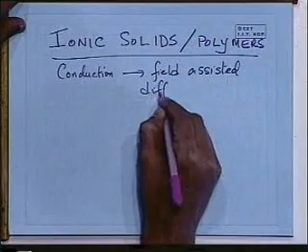In ionic solids, we saw the different kinds of defects that are possible. We've got vacancies, interstitials, Frenkel kinds of defects, Schottky kinds of defects, and remember we are talking of charge balances and so on. What we see here is the presence of these defects allows diffusion, so the atoms can move from one position to an empty space because of the presence of these defects.

And because these are not atoms anymore in ionic solids, they are charged species, so along with the diffusion of the species, we have charge transport too, which is essentially what we mean by conduction. In a normal case with no charge, covalently bonded solids or things like that, when the atom moves there is no charge transfer because they're neutral species. But in ionic solids, along with the diffusion of species, we have charge transport taking place.

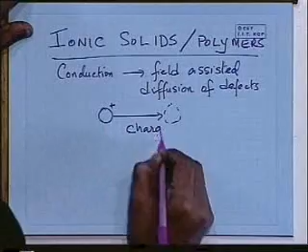So it then depends on the density or the concentration of defects that we have in such a material. And the species that could be responsible include vacancies, interstitials, non-stoichiometry, etc.

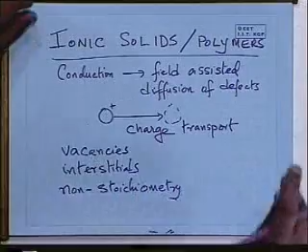So to take into account all these kinds of mechanisms, we will simply put that sigma is equal to the sum of the charge times concentration times mobility for each of the species. The same equation as before, except now we are summing it over each of the possible types of species.

And remember here, Q is not necessarily equal to E. It could be, but it's not necessarily equal to E. Why? Because the ions might be multiple. Very good, the charge is not just an electron transfer—there are charged species, ions that are moving, and they may be multiply charged. So whatever the charge of the particular ion, 2 plus, 3 plus, whatever it may be, or minus, accordingly will be the value that we have to use in Q.

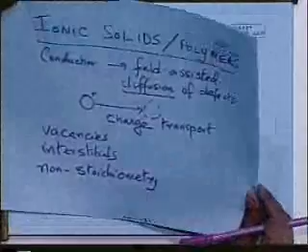Now in most of these cases, since it's diffusion, the key is diffusion, and diffusion is a thermally assisted process—higher the temperature, faster the diffusion. So we could, in most of these cases, model the behavior of conductivity versus temperature as sigma equals sigma naught exponential minus E sigma by kT. Again, a familiar equation, what we call the Arrhenius equation before, where we have put E sigma as the activation energy for conductivity.

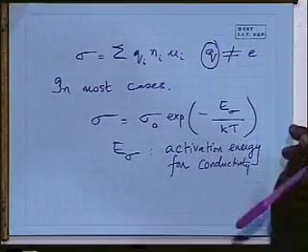The whole process is diffusion dependent, and so a very similar equation we found for diffusion also, and for vacancy concentration—these are all called the Arrhenius equations. And you know then what to do with such an equation to get the activation energy: we plot it and we get the activation energy.

There is a special case that comes for thin films. When I use the term thin films, I'm talking of nanometer dimensions—dimensions of the order of some nanometers. And in this case, we have to account for another scattering mechanism that is not considered in bulk materials. We're talking of conduction through a very thin film that may have dimensions of something like 10 nanometers or so.

And electrons are moving through this. We'll have the usual—there's thermal scattering due to atoms, there's impurity scattering if there are impurities. All that is there. But what else do we need to take into account?

I lay the emphasis on the word thin. What is that? Try it. Talk to me. Attraction between? Diffraction. Well, not quite.

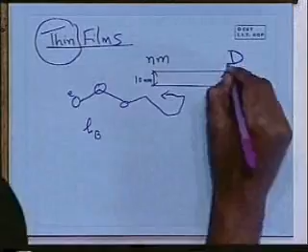In this case, given film thickness we express as d, the mean free path in a bulk sample, that's why the subscript is L subscript B, okay.

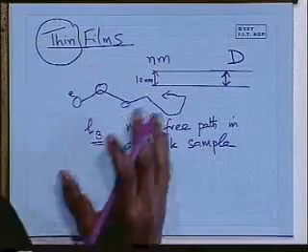And when we are talking about thin films, this additional scattering comes in when d by LB is less than 0.1. This sort of defines the thickness of the film D, only about 1/10 that of the mean free path. Typically D has the order of around less than 10 nanometers.

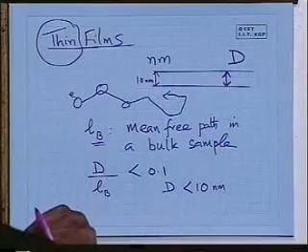So in such films, there is an additional scattering term introduced, and the resistivity sharply increases. You can find plots of resistivity versus thickness, and you find that at very low thicknesses, it sort of increases like that, because as we come down to the scale of few nanometers, the scattering term starts becoming the predominant factor.

If D is even less, we're talking of less than 1 nanometer. 1 nanometer is about 10 angstroms. You're talking of a few atoms, a few lattice constants perhaps. Then we have another problem: conduction itself may not occur because the film becomes possibly discontinuous.

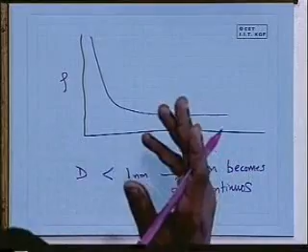It's so thin now that instead of having a continuous film, we have patches, and they don't touch each other. So the current trying to flow here is sitting on something. It passes through this path, but then it can't get here. So when we have very thin films, we lose conduction altogether. So what we're talking about with thin films has got to be bigger than 1 nanometer or so, so that we have continuity in the films.

Let me take up the topic of thermal conduction, because it is related, at least in the case of metals, to what we're talking about with conduction mechanism by scattering like a free particle.

What we see, if thermal conductivity, which is really what we will study, is that metals are good electrical conductors, but they are also good thermal conductors. Common experience: wires are used, metals are used to conduct electricity, but we also know when we touch a metal, it feels cold. The reason it feels cold is because it's a very good thermal conductor. That's the property of a metal.

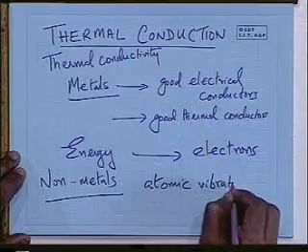The energy is coupled through atomic vibrations and transmitted down the non-metallic material. So phonons are the basic reason for conduction, the mechanism for conduction. Electrons in metals, and primarily a phonon-based mechanism in nonmetals.

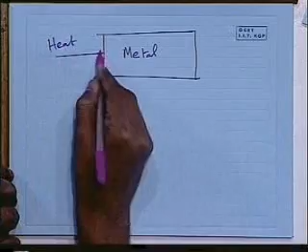We can consider the case of a metal, and we have heat here. The question is to look at the mechanism a little more in detail. I supplied heat here. How is the heat getting to this end? I'm limiting my heat supply only to one end. What is the mechanism that actually transfers the heat from this end to the other? Broadly, we said it is electrons. Let's look at that a little more.

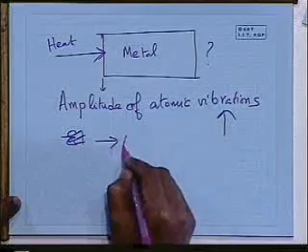At this end here, the hot end, the amplitude of vibrations of the atom increases. As more energy is given, the atoms are vibrating and their amplitudes are increasing. Which means now the electrons, in addition to that, the average kinetic energy of the electron is also increasing. They are also gaining energy from these vibrations by interaction with these vibrations.

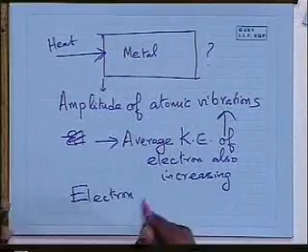So what happens to the electron when it has higher kinetic energy? The random motion that it undergoes through the crystal, the scattering, becomes far more enhanced. So the electron motion is enhanced because of the gain. They move faster, essentially, because they've got higher kinetic energy. So they gained energy interacting with the vibrating atoms.

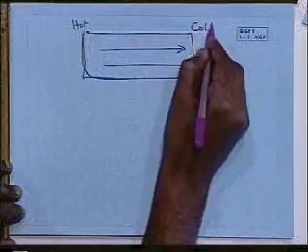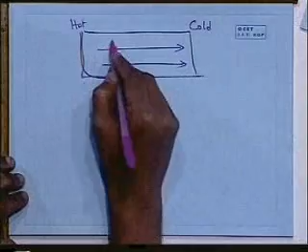Now they are moving faster through the material. And in that process, as they move from one end to the other, they are able to move from the hot end to the cold end, transferring the energy back there through interaction with atoms. So they gain energy at this end by interacting with large amplitude vibrations. Here, the atoms are not vibrating with such large motion, but the electron now has higher kinetic energy and can move in this direction. When it does that, it will take the energy with it. Then back again here, they collide with atoms and transfer the energy. So it is this electron that is taking the energy of vibration of the atom from the hot end to the cold end as it travels through here.

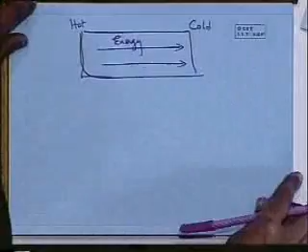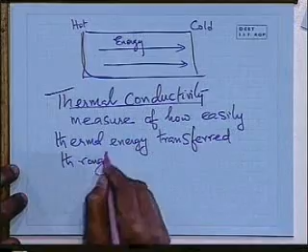The term we used earlier, thermal conductivity, measures how easily heat can pass through this material for a given temperature gradient. We'll come to some definition, a more quantitative number -- basically a measure of how easily heat or thermal energy is transferred through the material. We'll continuously see the parallels with electrical conduction. Thermal conductivity is the measure of how easily heat is going to flow from one end to the other, much like in the case of electricity, where conductivity is a measure of how easily current or charge is going to flow from one end to the other.

Yes? So the electron which has given the heat at the other end, is it going to come back again? Not necessarily. Yeah, there will be a flow, but it's not driven in a fixed direction, it's random, mind you. So there is no net transfer of charge taking place. If I cool it down back again, it will come back here.

We will come to where, if we are continuing to provide heat, we will generate a difference in voltage -- the thermoelectric effect. So if I heat it long enough and maintain that, yes, there will be enough EMF that develops. If I don't cool this end down... if I do cool this end down, now it's again reversed. So until it comes back to equilibrium, things will flow around and readjust. But if I keep supplying heat, yes, we will eventually develop an EMF, which is what we make use of in the thermoelectric effect. The electrons are able to flow in response to the temperature gradient to produce an EMF. Thermoelectric coolers, thermoelectric heaters, all work on that principle fundamentally -- they convert thermal energy to electrical energy. We generate the EMF by means of this transfer. But if I stop heating this end, eventually everything comes back to equilibrium.

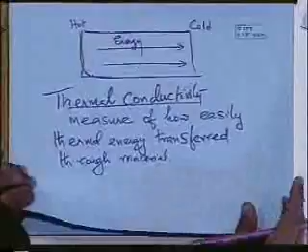All right, here's the scenario we have. We will look at a cross-sectional area A through which heat is transferred, and we'll look at a thin section of this, of thickness, say, delta x. So the area through which it is flowing is A, thickness is delta x, and across this delta x we have a temperature gradient delta T. One end is hot and the other end is cold.

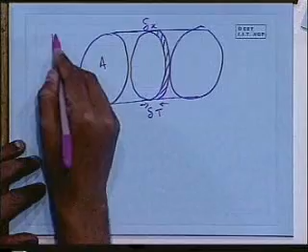And the heat transfer is from here to here as a result. We define then Q dash as the rate at which heat is flowing from hot end to cold end. Q dash is also written as dq by dt. It's a rate.

Two things we can surmise: one, that it will be proportional to the area. The larger the area, the more heat we'd expect to flow. And the other thing is the temperature gradient, the difference in temperature, defined as delta T by delta X.

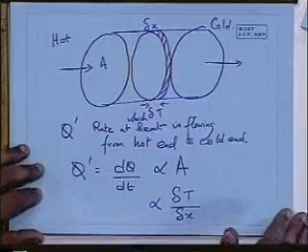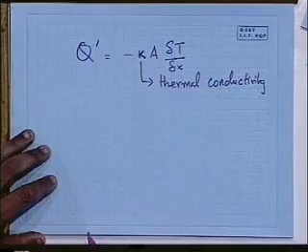So we will write Q dash, the proportionality constant being the thermal conductivity, times A times delta T by delta X. So we saw the proportionality, the constant being the thermal conductivity K. The negative sign here is simply implying that heat flow is towards the colder end.

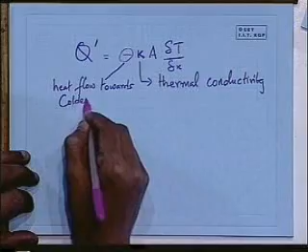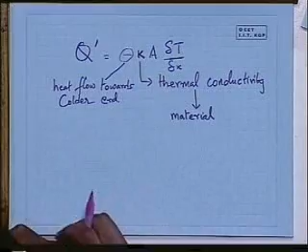This thermal conductivity term, K, is material dependent. So for different materials we have different values. For the same setup, same area, same temperature gradient, we will get different heat flow depending on the value of K. We'll see that in metals, K is pretty high, but there are non-metals too. We'll see why, for example, diamond has got a very high thermal conductivity, though it is completely insulating.

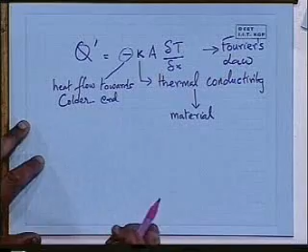This equation that we have here is also known as Fourier's law, and this is the fundamental definition of thermal conductivity. Q dash is equal to minus K A delta T by delta X, also known as Fourier's law.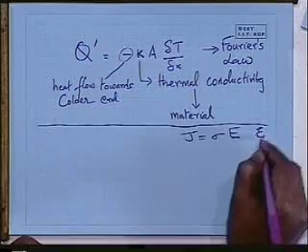Now, as I said, there's an analogy with electrical conduction. Let me write Ohm's law right here. The variation we looked at was J equals sigma E. Let me caution you, sometimes I'm not consistent with my symbols, maybe I've used a different symbol for E elsewhere. In books they've got so many fonts they can use, I don't have that privilege so I can't remain fully consistent, but I will mention what each term is. Here it's field, conductivity, and current density.

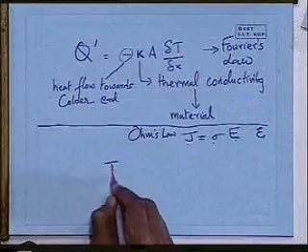I can rewrite this equation, Ohm's law, in a different way. That would be I equals sigma times A, since J equals I by A, I take the area term there. And then the field I can write as delta V by delta X.

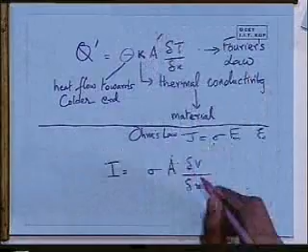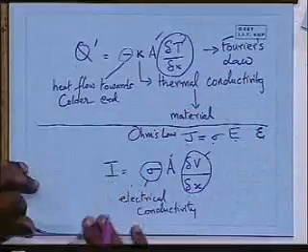So you immediately see the parallel between these two. I've got the area term here, and some kind of gradient over here, in this case a temperature gradient, in that case a voltage potential gradient. And then we have some constant term: in this case conductivity, electrical conductivity, in the previous case thermal conductivity. So in essence both these laws express the same idea. In one case we're talking of transfer of charge across a potential gradient, in the other, transfer of heat or thermal energy across a temperature gradient.

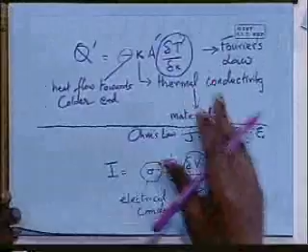So we see the two terms, sigma, the electrical conductivity, and K or kappa, I think it should be, a Greek term, the thermal conductivity. One may guess these two are related, since essentially it's the same mechanism driving both phenomena, and it turns out there is a relationship between sigma and this kappa term.

It's known by a large name, Wiedemann-Franz-Lorenz law, which we'll conveniently abbreviate as the WFL law. Three people were involved in finally formulating this idea. Two of them suggested a relationship, and then another showed the temperature dependence. Incidentally, this Lorenz is not the same as the Lorentz spelled with a T, who worked with charges and magnets. This is a different fellow altogether, but his name also appears here.

So what does this law state? The relationship between thermal conductivity and electrical conductivity is given by kappa by sigma T equals C-WFL. What is C-WFL? It's the constant known as the Lorenz number, or alternatively as the Wiedemann-Franz-Lorenz coefficient.

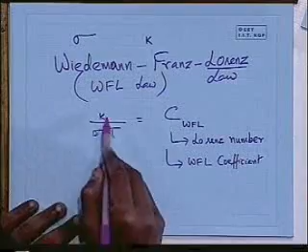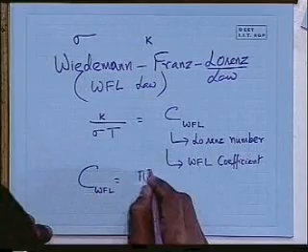Kappa by sigma T is equal to CWFL. And what is C? We can have an equation for that: pi squared k squared by 3e squared, where k in this case is the Boltzmann constant, not to be confused with the kappa that we are using for thermal conductivity.

Since these are all constants—Boltzmann's constant, e, and some other terms—we can write a number, a value for this: 2.44 into 10 raised to the power minus 8 watts ohms per Kelvin squared. Okay? That's a constant.

You may wonder how they got that. You can do that from experiment, and I'm coming to that in a second. We're talking primarily about metals, so what they did is take the conduction and plot it for pure metals: thermal conductivity, kappa, versus electrical conductivity, sigma, which are both measurable quantities.

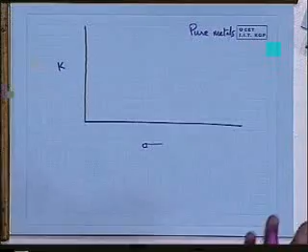So if you take this, what will we expect for pure metals? What will the graph look like? A straight line, right? Whose slope is given by CWFL times T. So when they did this, kappa has units of watts per Kelvin per meter, and electrical conductivity has units of per ohm per meter.

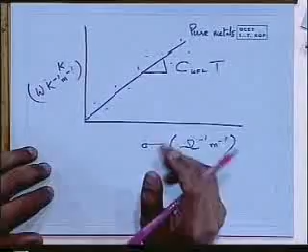When they plotted the data, it looks somewhat like this, and then when you model it, you get a straight line. From such a line, you can then calculate this constant. That's how that previous number was possibly obtained. It turns out to match this value, so theory and experiment more or less match for us.

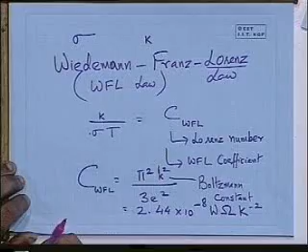Now when you look at the WFL law equation, we saw earlier that sigma has a 1 by T dependence, right? As temperature increases, conductivity decreases. So what can we say based on this law about the temperature dependence of thermal conductivity? Given that this is the relationship between thermal conductivity and electrical conductivity, and we know electrical conductivity is proportional to 1 by T, what should be the temperature dependence of kappa?

What is that? Go ahead, talk. Is it also proportional to 1 by T? It doesn't vary with temperature, according to this equation. Do you see how that works out?

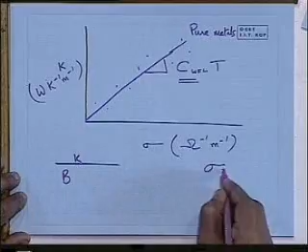All right, let's look at that. Kappa, substituting sigma as some constant B by T, roughly—so B by T, and I've got another T term here, and this whole thing is equal to my constant. It simply suggests that kappa does not depend on temperature, which is strictly not true. But at least what we can surmise is that kappa, or the thermal conductivity, has a weak dependence, if anything, on temperature.

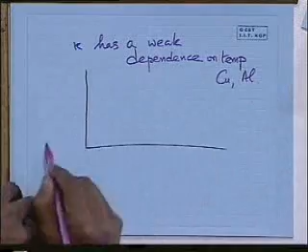And then when we look at experiments, say we take pure metals like copper or aluminum, and we plot kappa versus T in Kelvin, what we observe is a shape something like this. It's not strictly true that it's constant everywhere, but above about 100 Kelvin in these cases, we find that the thermal conductivity is more or less constant. It is related to the fact that the motion of the electrons—the velocity we saw earlier—has only got a weak temperature dependence.

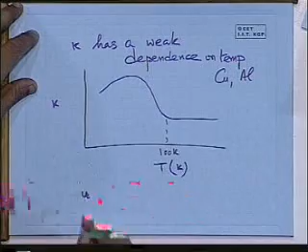In an earlier lecture we had seen that. So since the energy is being transferred primarily by the motion of the electrons, and the electron motion itself has only got a weak temperature dependence, therefore the conductivity too has a weak temperature dependence.

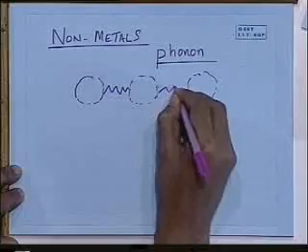In the case of nonmetals, we said that the conduction mechanism is not by electron flow, but rather by phonon mechanism, or lattice vibrations, or atomic vibrations. We can simplify our picture by looking at the crystal as a series of balls that are coupled together by springs.

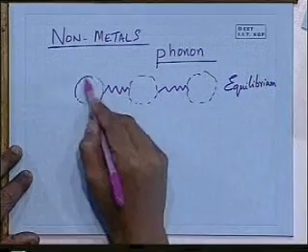Right, it's a simplification. But all these atoms are undergoing simple harmonic motion as they vibrate. And this is, say, the case in equilibrium. They are sitting in equilibrium, and the springs are modeling what? If the ball is the atom, what does the spring model for us in this picture? Bonds—very good. So what we're talking of is atoms modeled by these balls, and springs that model the bonds. That's the picture we have in equilibrium.

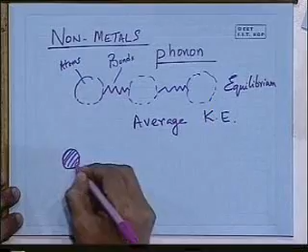Now what I'm going to do is give some energy to it. So this whole setup in equilibrium has got some average kinetic energy—it's sitting at a certain temperature where all these have some average kinetic energy. I'm going to disturb the equilibrium by supplying heat at one end. And what I have now is that the atoms here vibrate with large amplitudes. Because these are coupled with each other, I will get an effect that is passed down. You can see the vibrational amplitude is decreasing, but eventually it's getting to this end too.

So this is the hot end, and this is the cold end. And in this case, the electron is not taking my heat from one end to the other. It is the fact that these atoms are all coupled to each other, and so the vibration that starts from this end with a large amplitude is getting transmitted by what might be thought of as a vibrational wave.

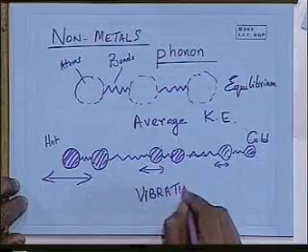It's as if we have tied one end of a string, and I'm taking the other end and shaking it violently. Eventually that wave propagates down to the other end of the string that I'm not shaking. So it's something like that: this end here, the atoms are getting hot, they vibrate, and because they're coupled, they'll pass on that vibration, so some kind of wave of energy is transmitted down.

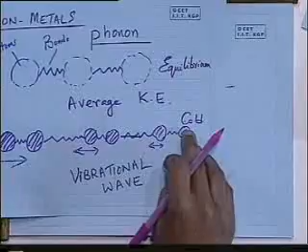This part we remember: if you looked at the potential energy versus distance diagram from long back, as we increase the energy, the amplitude of vibration is increasing. So basically this end here, they are sitting at a higher energy, and so they are vibrating with larger amplitudes, and as we get to this end here, the amplitudes are smaller, but eventually they're all going to get to equilibrium.

Now if this is the model, the question may be asked: what are the possible factors on which the efficiency of heat transfer would depend? Obviously electrons are not playing a role here directly. So if the energy is being transferred in this kind of wave, what would be some of the factors that could affect heat transfer in a non-metal? Nature of the bonds, very good.

So one of the factors would be nature of bonds. And more specifically, how strongly these bonds are coupled with each other. The atoms are coupled.

Any other factors? Remember, it's a wave that is propagating. What else could happen in a real crystal to a wave that is propagating? Coordination number. Why would that be important? Suppose we have an atom which has the energy and is surrounded by 8 particles, and another atom which has the same amount of energy is surrounded by 4 particles. The amount of energy given, if we assume that it's distributing equally - that's a possibility.

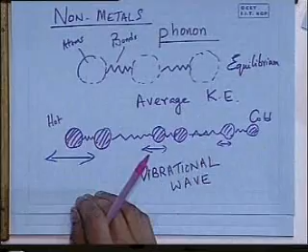Coordination number - but I'm not sure that that is distinctly the case, whether it will distribute it equally. Defects or inclusions - why would that be important? Because it would change the nature of the bond, the vibration will check. All of a sudden, 1 or 2 atoms are missing here. If you simply think of a one-dimensional linear chain, the wave can't get to this end. So we can put that in brief form as the scattering of these waves by various mechanisms, by imperfections of various kinds.

Another important thing could be that these waves interact with each other. Remember, there are so many atoms that are vibrating. So the interaction of the vibrational waves with other vibrational waves could also play a role in how the wave is propagating throughout.

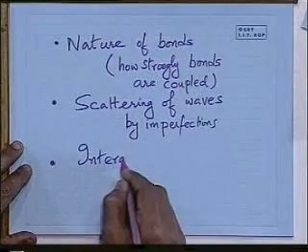Among all these, probably the most critical one is the first one, the nature of the bond - how strongly it is bonded. And it turns out that diamond, which I told you earlier has a very good thermal conductivity - now you may be able to guess why. Diamond, we know, is a very strong covalently bonded material, so the coupling is very strong. And if indeed the mechanism of heat transfer is by transfer through these vibrations, we would expect that diamond will have a high thermal conductivity.

It turns out to have a value something of the order of 1,000 watts per meter per Kelvin. So diamond is a very good heat sink. And people are talking of using it in electronics, not necessarily for its purpose as a semiconductor - a wide band gap semiconductor - or for insulating purposes, but simply as a heat sink. Because as we compress more and more circuits onto the chip, heat is generated. And if you have a layer of diamond under there on which we can grow things, then it's a very good heat sink. Or if the diamond itself could be used as part of the circuitry, that would also offer advantages.

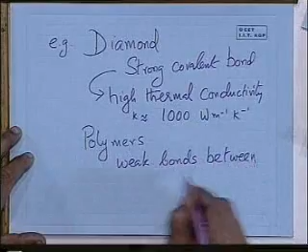The complementary example, the opposite case, are many polymers. Now we know in polymers, the bonding between the chains is weak. If you know anything about polymers, the plastic kind of materials, they're long chain molecules, and between the chains they are rather weakly bonded. So many polymers end up with very low thermal conductivities, less than 1 watt per meter per Kelvin. So they make very good thermal insulators.

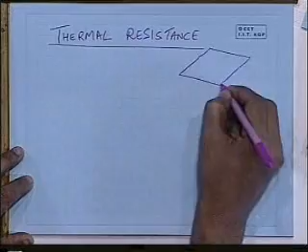We can define something called a thermal resistance in analogy with electrical resistance too. We will define for a cube of material, or a block of material, it doesn't have to be a cube, of length L, that heat is flowing in from this end and coming out this side.

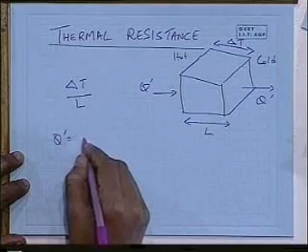Then as before, the temperature difference is delta T, the gradient being given by delta T by L. So here we have Q dash is equal to A kappa delta T by L, which we can rewrite as delta T by L by kappa A. I'm just rewriting this equation here for us.

And similarly, putting Ohm's law down there for us, I is equal to delta V by R. V is equal to IR, the familiar form. R itself is what? Rho L by A, which I can write as L by sigma A. So here I can write it then as delta V by L by sigma A.

So this term here and this term here are analogous to each other. This is an electrical resistance, R. This is the thermal resistance. Do you see the similarity between the two? And so we define thermal resistance and we call it theta, as L by kappa A. So in other words, my Q dash is equal to delta T by theta.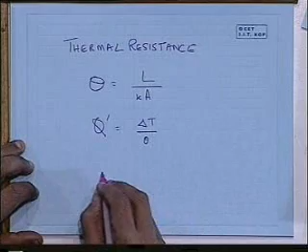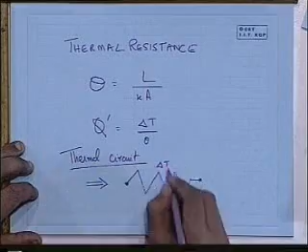And we can do something similar to an electrical circuit and draw a thermal circuit. Heat is flowing in from here. The circuit has a resistance theta, thermal resistance theta, temperature gradient delta T, and the heat flow through the system is Q dash. So Q dash is equal to delta T by theta representation. Just the same as we talk for an electrical circuit.

I want to go back a little bit to complete a thought that I didn't take up earlier. When we talked about resistivity and things like that, one of the rules I gave you was Matthiessen's rule, right? Different components of resistivity simply add up, it's a sum. Well, what if you have got more than one kind of material, alloys, mixtures? In those kinds of cases, there are some other rules that are useful, and I want to give that so that we can make use of it subsequently. One of the rules that we will make use of is called Nordheim's rule for alloys.

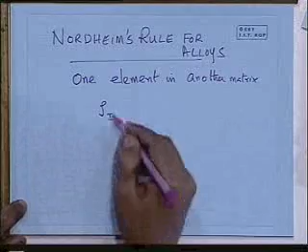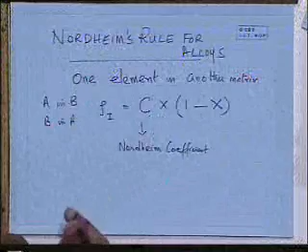This is useful when we have, for example, an alloy with one element dissolved in another matrix. And the rule simply states that the impurity component of resistivity, mind you there's more than one, so the impurity component of resistivity is given by C x (1-x), where C is known as the Nordheim coefficient, and basically it's a measure of how effective that solute atom, dissolved in the other matrix, is in increasing the resistance or resistivity of that matrix. So that's a constant, different for different elements. If you have element A dissolved in B, this constant is different than if B is dissolved in A. It depends on what is in larger concentration, which one we call the matrix and which one we call the impurity. X is the atomic fraction of the impurity.

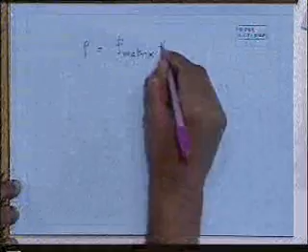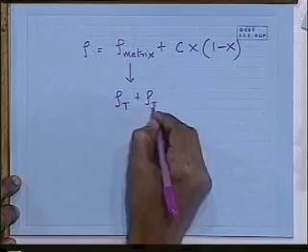So here we can have rho I is equal to C. Now the total resistivity then is rho matrix plus C x (1-x). The matrix itself, in the absence of this impurity, has got a certain resistivity, and what Nordheim said is that this is the additional term that is added on to the matrix. The matrix itself consists of the temperature dependent phonon scattering plus impurity scattering term for the matrix itself. There may be other defects and so on that add up here, what we call the residual scattering earlier. And then you have this term that is being added on by the deliberate alloying.

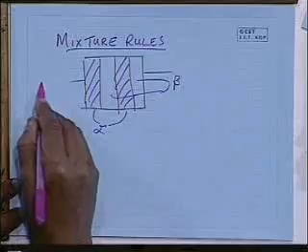Suppose we have a layered structure. This is an idealization: there's an alpha phase, and then a beta phase. Current is flowing, and we can define it either flowing perpendicular to these layers or parallel to them. Let's take the case where current flow is perpendicular to these layers, so in other words, these layers are now in series to the current flow, and current has to flow through this in this fashion.

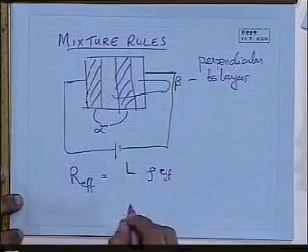We can define an effective resistance, R effective equals L rho effective, an effective resistivity, divided by A, where A is the cross-sectional area of this setup. We write R effective in terms of its components as L alpha rho alpha over A plus L beta rho beta over A, where L alpha and L beta are the total lengths — in this case referring to thickness. Each phase has a certain length, and we add up for each phase, so L alpha plus L beta equals the total length.

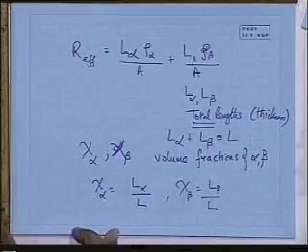From here we can derive an equation. We define chi alpha and chi beta, the Greek terms, as the volume fractions of alpha and beta. Because the areas are constant, we can write chi alpha equals L alpha over L, chi beta equals L beta over L, since we're considering an ideal structure with equal areas. So we can express the earlier relationship as rho effective equals chi alpha rho alpha plus chi beta rho beta. If current flow is perpendicular through these layers, we express it in these terms, and this is known as the series rule of mixtures.

This is a good approximation when both phases have similar resistivities. If one is very different from the other, we can't use it. But if they're similar, this is a very good approximation for a random mixture, even though we've taken an ideal case of slabs and layers.

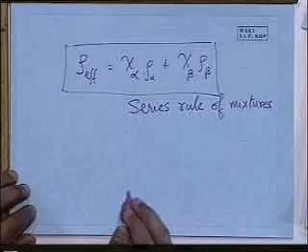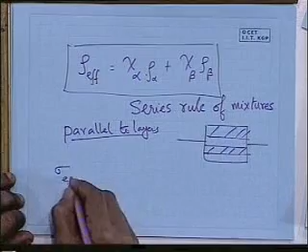If you take the current parallel to the layers instead — I don't have time to go into it — we get another expression. Now with current applied parallel to the layers, using a similar approach, we get sigma effective equals chi alpha sigma alpha plus chi beta sigma beta. This is known as the parallel rule of mixtures, where the conductivities for each phase are given in the effective case.

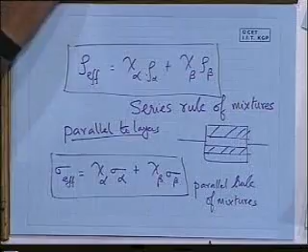There's one more thing I don't know if I have time for — probably I'll take it up next time. When it's all random and one phase's resistivity is very different from the other's, there are a couple of rules. I don't think we need to go into it, but I might give it to you as a note, since I want to start another topic maybe from tomorrow. So we'll stop here.

Maybe I'll give you a small note which includes two equations — empirical relationships useful in problems. For example, if air is dispersed inside a continuous matrix as pores, how do we calculate the total resistivity? These aren't layered structures like before, and the resistivities are very different. So I'll give you a note with these two equations. That's all there is to it. We'll stop with that here.